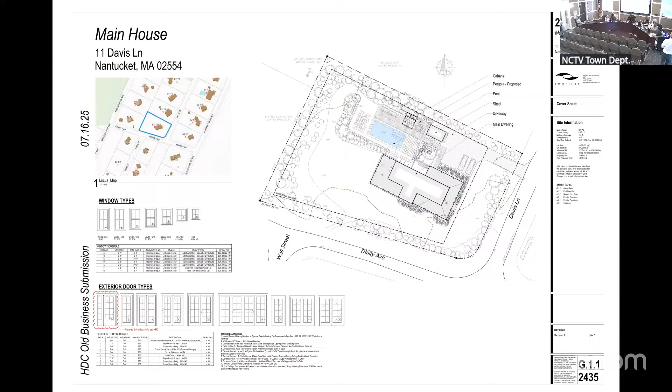So we could maybe go to the elevations. These are the revisions. If you recall, we came back before you to alter the second floor deck detail. We had horizontal wood members, not cable. And the suggestion was to add kind of a hybrid, basically, where you're creating a half shingled wall and then the remaining portion being the horizontal wood members. So that's what's before you.

So with that I'll turn it over to you, Mr. Chair. Thank you, Matt. Does anyone have any concerns with this? Dale?

It is gray, Mr. Chair, through you. Gray? Not natural weathered gray or? Gray, painted gray. My concerns are still the same from the drawings. It seems as though the doors still seem like doors where the shingles across that we had before—I think it was all shingled—sort of mitigated that. It just seems like an overwhelming amount of fenestration, but I may be the only one who thinks that.

I'll go with that. That she's the only one that thinks that, or that—I don't think it mitigates it at all, in my opinion.

If I could, Mr. Chair, through you—Matt. Yeah, go ahead, Matt. Really briefly, I think when the elevations in the CAD drawings show things in a way that, from a perspective you don't really see—because of the wood horizontal members, I think your eye kind of stops at those. So I totally understand your point, Val. I think in reality, when you see that outer edge, the delineation of the top rail and the horizontal members plus the shingles, that's really where your eye goes, and the actual bottom half of those French doors is set back some number of feet. So I still think, in reality—and again it's my opinion—that you really won't see the lower section. In these 2D drawings it presents itself more dramatically, for what it's worth.

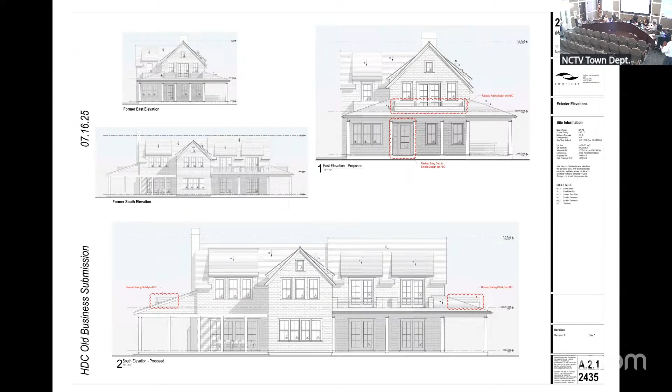I just want to say something before we move to 20 Derrymore Road. I think this is, at the Nantucket Historic District Commission, a historic moment. We have 3 old business items, and I want to thank everyone for their dedication to being succinct and exercising their authority by telling people what they want, because the result is our old business agenda is being whittled down to nearly nothing. So whatever y'all are doing, please keep it up.

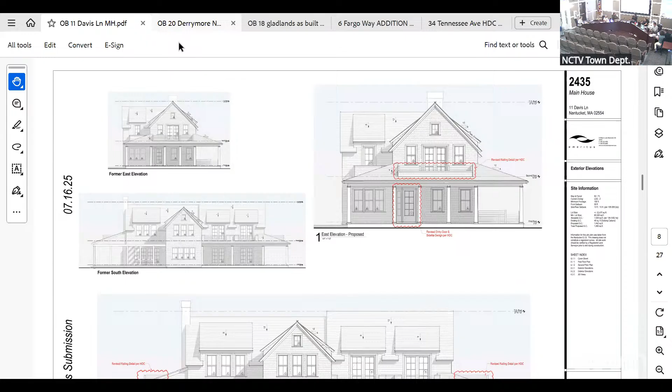I thought that's just because some were hiding in the file in the back somewhere. Nope, that's what's there, that's all that's coming in. That's 20 Derrymore, Linda. Wait till next week. Yeah, I know, just giving everybody a pep talk. All right, this one's good. Appreciated.

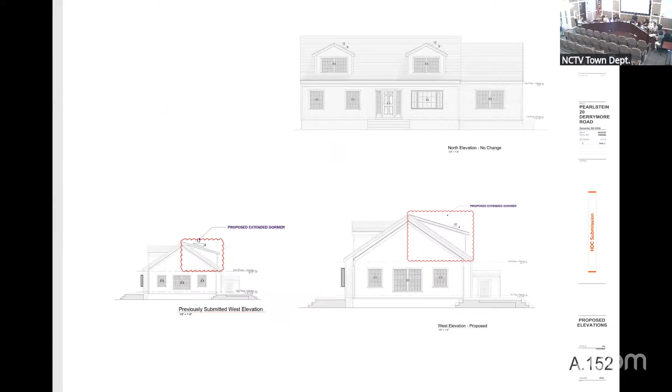The board is the regular board, except for, no, Connie, not Ray, but Connie. I'm not on it. You're on as an alternate.

You wanted the drawings to reflect exactly the dormer that is there. He redrew it, drew the dormer that is there. We narrowed the dormer, and there you go.

The board, so you have it, Linda, because I know you're going to ask that next, is myself, Abby, Val, Angus, and Connie. Are there any concerns?

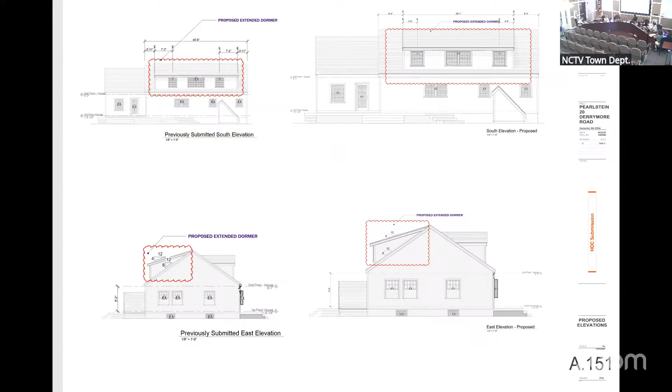Since I see no one falling over each other, is there a motion? I make a motion to approve as submitted. All in favor, say aye. Aye. Any opposed? That carries unanimously.

Connie, is it pizza time yet?

We're now on to 18 Gladlands. Your board is myself, Ray, Val, Angus, and Carrie.

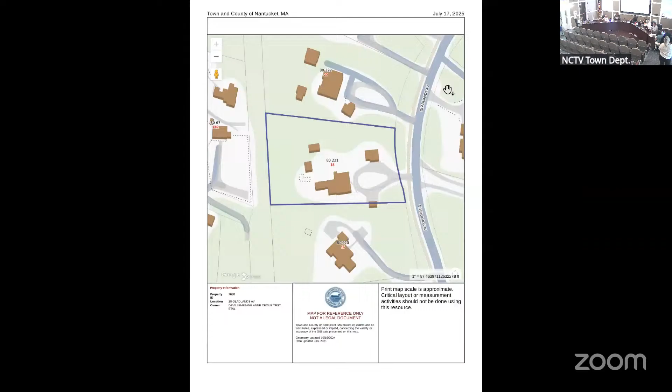Carrie, can you hear us? Yep, I'm here. Super, thanks. And we can hear you. The cattle grate is still there, I went there today. Okay, so we're gonna let Tori present and then we're gonna go from there, okay?

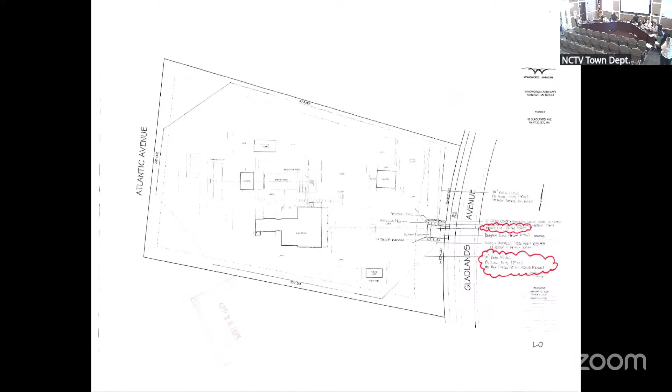Good evening, everybody. So we left it that we really were not fans of the cattle grate period. Your general opinion was that you didn't want any of the Belgian block either, but the landscaper and I revisited the street, and I've included precedent photos of Belgian block at almost every driveway, including the side that has the bike path with Belgian block on both sides. So that was one thing I wanted to bring to your attention. We have proposed a gate, as you suggested.

We've given a sample photograph at the end. This is the original photograph I submitted, marked up with where we're proposing the Belgian block and the pedestrian gate to the right, along with a picture of the pedestrian gate sample at the bottom.

You can see there's space between the cattle grate and the post in this picture, and the year-round evergreen isn't planted yet. Since then, we've brought these posts in and brought the driveway to the edge, so that space isn't there, and planted more evergreen on the left and right of each post to mask it and create more of a vegetation barrier, plus added more vegetation on the street side. I just wanted to bring the old photo to your attention so you could recognize the changes.

I tried to give the address of each Belgian block example on the road. There's one with Belgian block on both sides of the bike path, another one right across the street, and another one just to the left of us.

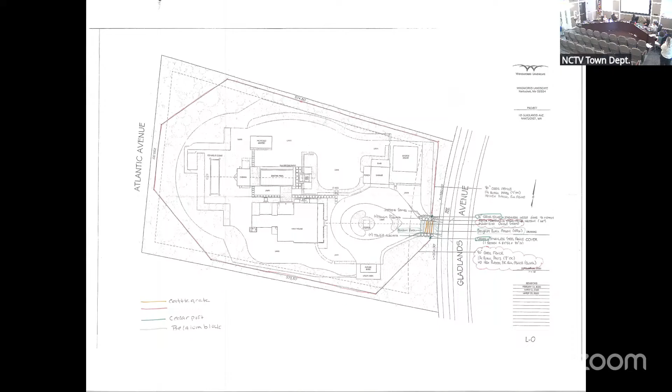If you can go back to the photo, I'll explain. So, that's your example — you see where the post is, you see where the grate is? That post should be in front of that grate if they're even trying to keep the grate, not bisect it and leave it in front of the gate, or even partially in front of the gate. The point was, I think, to eliminate that, and if they're not going to eliminate it, it should be mitigated somehow.

You're trying to avoid a peekaboo grate, as they say, where some of it is on the roadside of the gate. Well, it doesn't make any sense to me, but that's what you're trying to avoid? Yeah. Okay, thank you.

Who else? I don't care about the Belgian block. Angus? I'm happy to go. Except for the Belgian block that went out like three times the depth — straddling the walk is one thing, but going back on the property and being on the backside of an element on top of that is overkill for the Belgian block.

I don't think that the Belgian block really hides the grate, as one might hope. And it's still something that isn't on any of the driveways for the whole Gladlands Avenue. So that's still an issue for me.

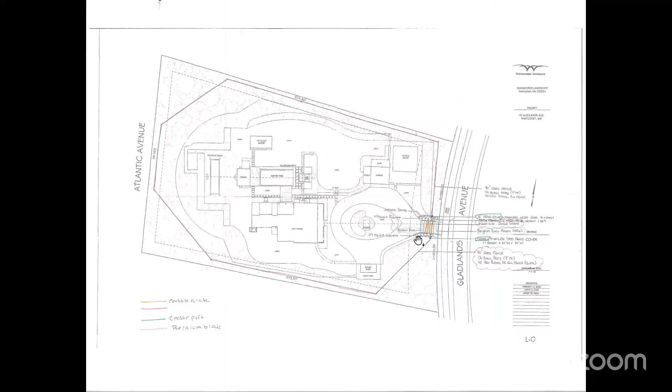Anyone else with concerns? I'll go. I'm confused as to why there are gates and a grate. Aren't they supposed to be doing the same thing? It's a little overkill. I'm fine with the Belgian block doing whatever it's doing, because Tori's shown us that this street has Belgian block in all different formations. So I think the cattle grate should go and the gates are fine, because with the gates, you don't need the grate. And we don't want to start a whole new trend with cattle grates everywhere.

Thanks, Carrie. Anything, Ray? Yeah, so I'm also fine with the precedent for the Belgian block, the extent of it. It's obviously not the first time it's happened there. And I think Val has a good solution to the problem of the grate, which is we move the posts and the gate forward so that the entirety of the grate is behind the gate. Those are my thoughts.

Okay, thanks. I would agree with Ray, however, my concern is that the gates will be too close to the street. I think these gates are appropriate if they're not a central element in terms of defining the entryway. Obviously you're going to see a gate in a driveway if there's a gate there. But if it's prominent, right up near the street, I'm thinking like 3 Primrose and others in rural areas, it really changes the nature of the character in the setting. So my concern is that the gate be moved forward, and I don't think that's appropriate.

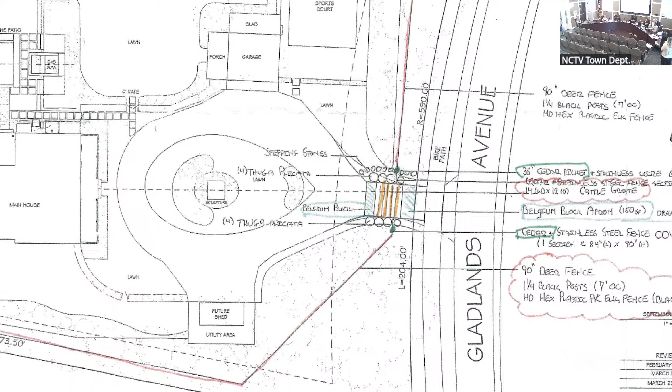Are we okay with the pedestrian gate? The simplified gate, right, just no pickets? You're asking specifically about the pedestrian gate as part of the application, the precedent photo, which is to the right of the posts currently. My only concern with that is introducing pickets where there are none.

So I would say it should not mimic the pickets, but the style of the vehicle gate. Yep, and that would be on Exhibit A, which is to say with the supplementary vegetation in front.

Yes. So first of all, the gate will move back to the rear edge of the Belgian block, rear being with respect to the house, away from the road. The person gate will mimic the vehicle gate, except obviously be smaller. The grates will be removed and replaced with Belgian block, and there will be supplemental planting along the street, all in Exhibit A. Is that a fair representation of your motion, including the as-built?

Including the as-built. I just have one more question, I'm sorry, to bring to your attention. So the deer fence that exists at the post would then wrap back to the gate, is that okay, hidden by the vegetation?

On Angus's motion, let's do a voice vote. Just to be clear, that wouldn't go along the drive, it would need to be set back, yeah there would be vegetation, so it would come back around to where the gate is, where the new trees are planted, it would be behind the trees.

Angus will address that in the Exhibit A. On Angus's motion: Angus, aye. Carrie, aye. Ray, aye. Al, no. And I'm an aye. Okay, thank you very much.

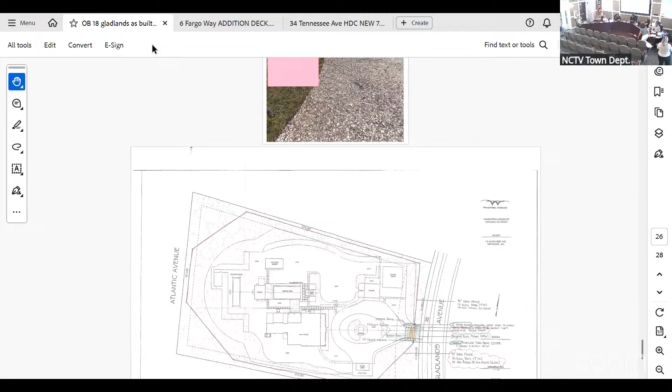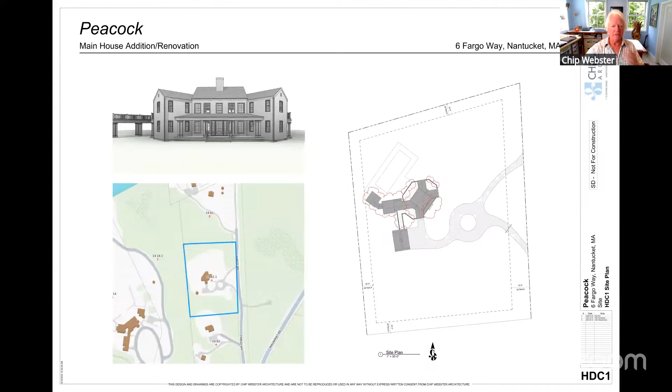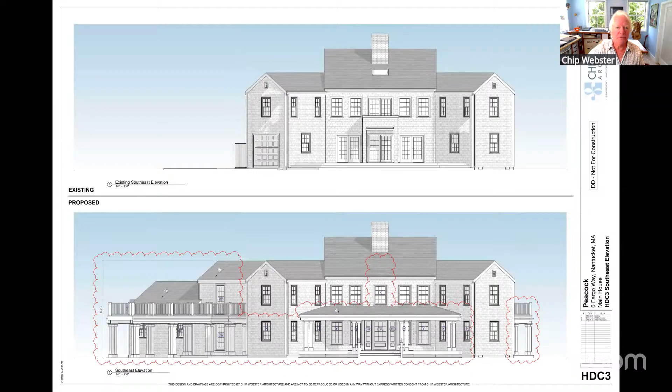Please proceed. Okay, if I can share the screen, I will walk through the application. I can't get this one to come up. With our new system, I just sent a request to share, a little icon came up, and looks like I can now share, great. Let me know if that comes up okay. We're looking at a very populated desktop, which also makes your computer run slower. I see what happened, okay, we see it now. Okay, go ahead and proceed with the changes.

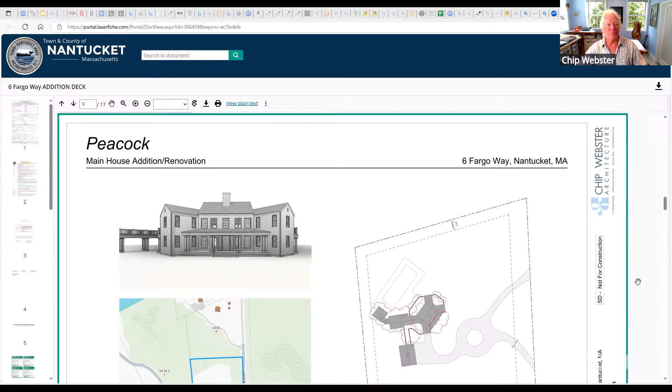Good evening, everyone. First of all, congratulations on a super short agenda, that's amazing. We're hoping for a super short meeting too. Yeah, so I'll be super quick. Chip Webster on behalf of the applicant for the proposed addition renovation at 6 Fargo. I'll start with the locus plan for the location.

It's on Fargo Way. If you're not familiar with that, that's off of Wauwinet Road. To the right of that, you can see the plot plan with the areas clouded that are part of this application.

I want to point out on this plot plan, you'll see a proposed garage that is not bubbled, only because that's not part of this application. That's still in design. But you'll also see a breezeway that connects the main house to that garage, which is included in this. I just want to point that out because it might look a little confusing otherwise.

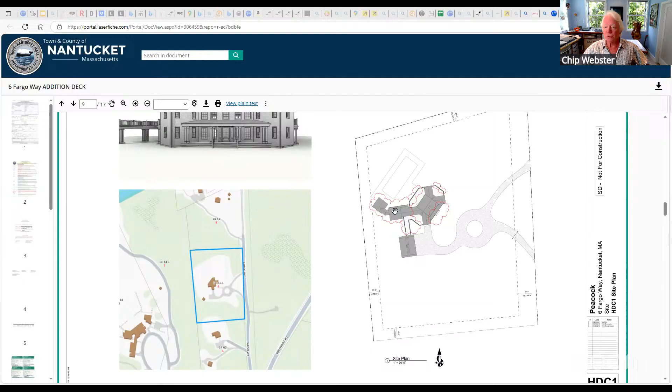You can see that the primary addition is to the rear of the house. And then there are some, as we'll see, proposed changes on each of the elevations.

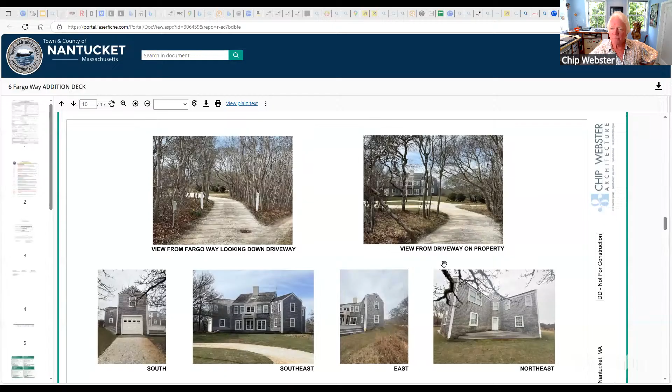So here's some existing photos. The first photo, looking down the driveway, is standing on Fargo looking into the property, where you can see a view of the existing house is highly mitigated by a lot of vegetation. That next one, view from driveway, I actually walked into the property, but just wanted to show you if there were any visibility from someone coming in, what angle of the house it would be.

That angle, that view is synonymous with the southeast photo that is in the next row of photos. And then the other photos accompanied.

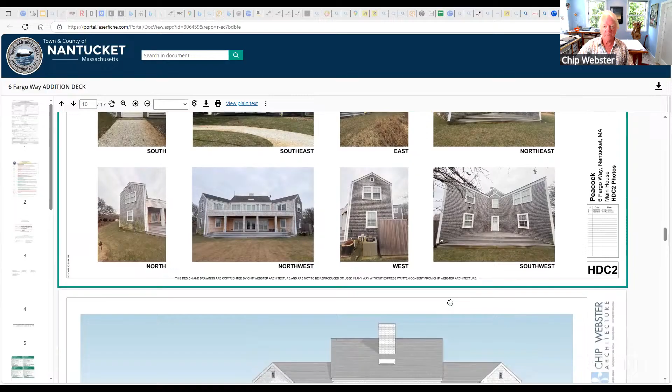On that elevation, which would be the most visible, but albeit still mitigated if you're on Fargo Way, you can see the upper—this was sort of a classic Gwen Thorson house, center chimney with symmetrical flanking wings, with a lot of glass and so forth and a skylight.

So we are proposing, one, to remove the skylight, two, to replace that second floor mulled unit with a single unit and add a porch across the front with more traditional entry fenestration with a center door and windows. That is the entry elevation.

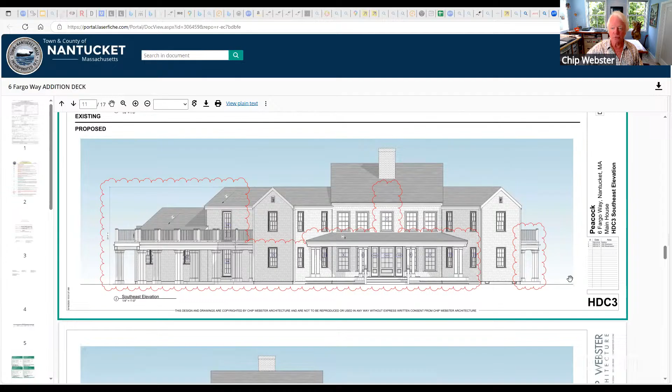You can kind of see, which we'll see in a second, around the corner to the left, the addition that is to the rear of the house. Moving right along, this is the back of the house.

On the top, we have the existing—yes, your time is running out. I'm okay, not going to cut you off, but I just want you to be aware of it.

Okay, then the other two sides and so forth, and door and window schedule, and I turn it over to the board for comments and questions.

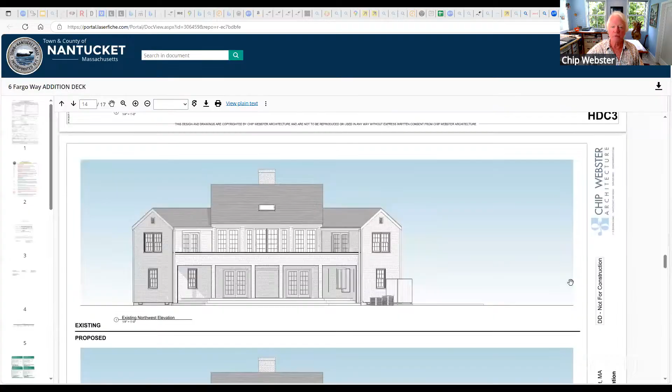Thank you. Yeah, I presume people have previewed the application, so. Okay, who would like to begin? New board, regular members. I'll let the members.

I could go. This is quite an odd house in that it seems very tall and boxy and doesn't sit on the ground, sort of like its own little rocket ship. And adding these wings off to the left and tapering down kind of grounds it for me. I know it makes for a very large house, but in some ways, I think it's helped this architecture. So those are my opening statements.

Thank you. Anyone else with concerns? I'll just say that I agree with this. I know this house and yeah, it's pretty tall in relation to its width. So this additive stuff, the porches and so forth, are going to remedy that. Anyone else?

It's a net benefit. I agree too. It's just the oddball connector to the garage—a little heavy decking, and if you look at it, it is like a U shape. Is there any way to simplify that?

Just that discussion about that decking, if you see how it all ties together, but other than that, I'm fine. I like the additive massing. Okay, thank you. What do we want to do, folks?

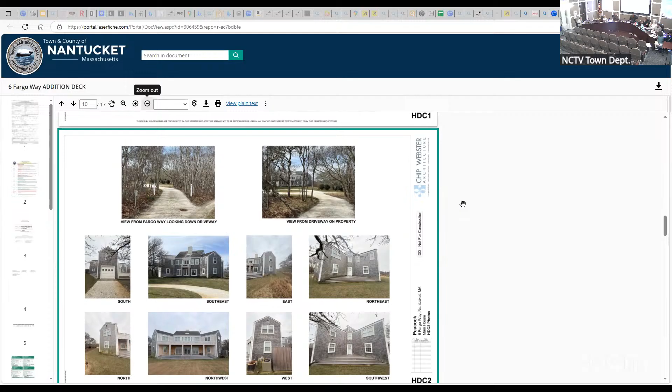I would make a motion to approve as submitted. Okay, on the motion, all in favor, say aye. Aye. Any opposed? Okay, it carries.

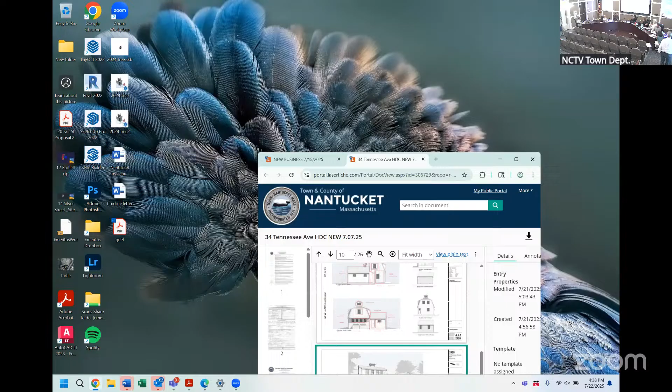No, okay Matt, you sharing? There it is. Oh.

In the future, you'll be able to do that for your presentations. Yeah, you made some changes, correct. Okay, so I'm just gonna give you the quick rundown here.

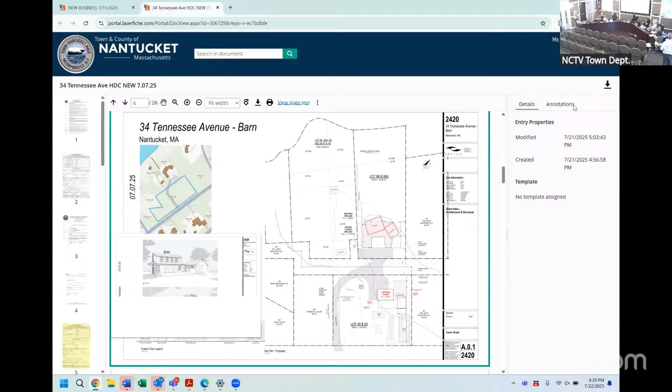36 is across the street here. So if you recall, that was the new dwelling that was approved. There was a structure on the property, the main body of which was a gambrel structure, that you approved to move across the street, which is lot 49 and 50. So that was approved, and the two areas are highlighted. During that process, the two wings had been approved to be demolished.

At one point, we suggested, or you suggested, is there any way to take or retain more of that existing structure? So what we're before you tonight for is to propose some changes to the gambrel that you allowed us to move across the street, but also to salvage that one portion of the original structure and move it and integrate it into this structure. I don't know if that makes sense.

So you're resiting and making modifications to the originally proposed structure. Correct, the resiting is in addition to the originally proposed. Exactly. Can you show us the pictures?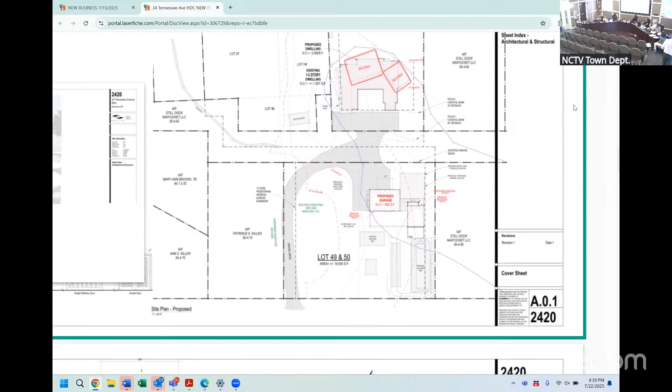Certainly, the elevation. The other thing I want to tell you about the structure is that it's going to be used for an agricultural use. So a lot of the details, the design and the layout, is specifically a reflection of the owner's use, if you will. Is that first floor, is that planting beds inside?

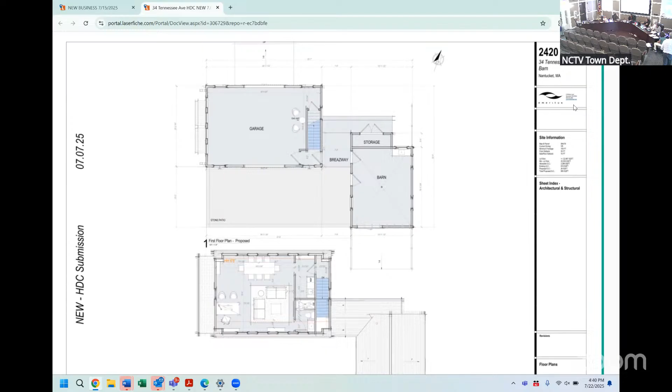No, it's the second floor. That's the second floor, that's the first floor. So the second floor is basically like a home office, if you will, but the first floor is all utility, in what we're calling a barn. A lot of the architecture literally is a direct reflection of how these owners are planning to use it. So I learned a lot of familiar or new terms about horses and agriculture.

Anyway, we've provided two elevations on the right side for your reference. One is the gambrel structure that was relocated and approved. That gambrel in the upper right-hand corner reflects what the HDC has approved. We've also included the elevations of the portion of the structure that we're proposing to reuse, repurpose. Obviously, if there were portions of that elevation that were obstructed because it was connected to the house, that's why that profile is there, that poché area.

So the bigger picture here is that we're looking to basically connect these two structures with a breezeway. Looking at the northwest elevation, the one-story element on the left is the relocated, reused section of the house. We did, per request of the owner, add an addition to it for tools, farm tools if you will, directly in the front of it. Then the breezeway is just to connect them, because that's going to be basically the gateway to get into the rear section. The gambrel portion, the first floor, will be used as a barn.

Some sliding barn doors, board and batten siding. We altered the cupola or belvedere. We did add a pent roof on the right side of the northwest elevation, going towards the southwest elevation. Again, we aligned those barn doors because they will be used in that fashion, and then added a barn door to the one-story additive piece on the rear.

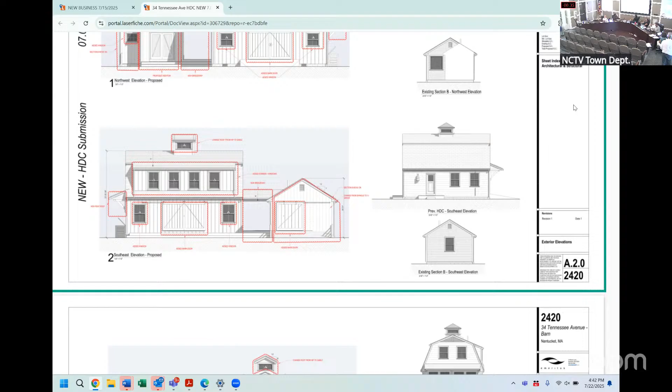The rest of the elevations, I think, are pretty self-explanatory, but we're all pretty excited about this, and the fact that we're able to reuse a lot of these pieces is exciting. And it's not just for aesthetics, this is going to be functional.

So with that, I look forward to comments from the board. Thanks, Matt. I just want to recap - so basically, you're barn boarding the proposed structure, you've added a dormer, and you're connecting a relocated element from a previous approval. Correct.

Val: Yes, I went out there to look at it. So this is the building that still hasn't moved yet, right? Correct. I appreciate reusing the building. The only thing I was struggling with, and the reason I went out there, is there is absolutely nothing with barn board on that street. It seems like the outbuildings are all shingled, so I'd be okay with this if it was shingled.

Okay, can you pass this to Abby? Does anyone else have any concerns? I agree with Val. I'm trying to picture going up and down Hither Creek, and I don't see any barn board. So I think it's a great design, and I think in shingles it would be more appropriate.

The only thing that catches my eye is on that far left on perspective B, that shed roof coming forward. It looks like it's standing in the way of the smaller gable behind it, and I wish somehow there was a way to address that. I like the breezeway, but I think the shed dormer with those two storm doors doesn't look cohesive to me, so those are my comments.

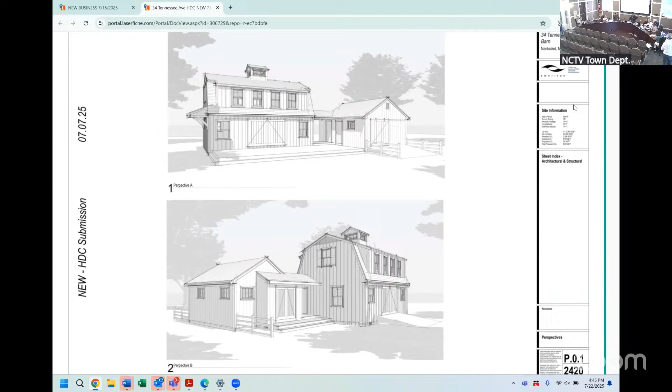Is someone interested in making a motion for an Exhibit A to that effect - shingle and wrap that shed roof as a hip? I don't mind it the way it is, but whatever, we're sticking with shingle and a hip. That would be my motion with an Exhibit A.

Excellent. All in favor, say aye. Any opposed? Carries unanimously.

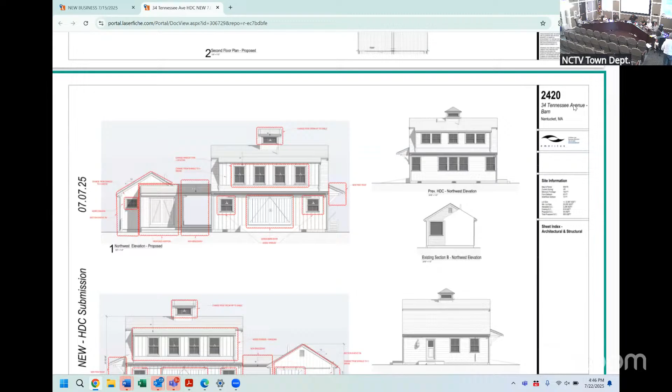Approved minutes of June 24th and July 15th. Thank you for reusing either of these. Yeah, that's very cool, it's gonna be beautiful. Thank you.

You're abstaining because I didn't look at them. One extension already signed it. Do we have a motion to adjourn without prejudice? Seriously, already? So moved. That's fantastic, woohoo! All right, all in favor say aye. Thank you everyone, have a wonderful evening.

That's a freaking miracle. Well, the funny thing is, I was thinking, depending on when I get out, I've got like a gigantic list.